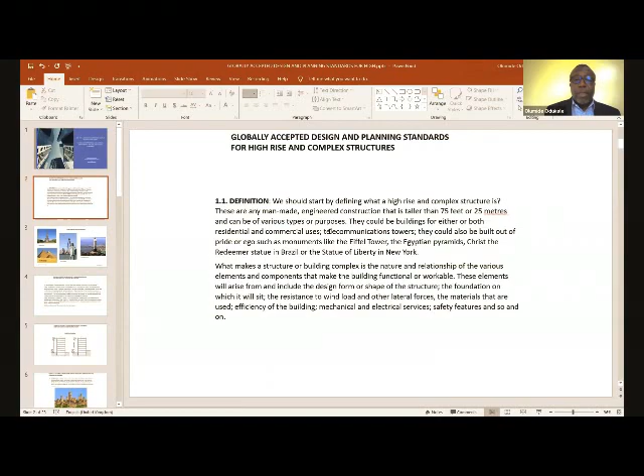Now, what makes a structure or building complex is the nature and relationship of the various elements and components that make the building functional or workable. These elements arise from and include the design form or shape of the structure, the foundation on which it will sit—which is a challenge, as we have seen today, especially in Lagos where we have a lot of loose soil—the resistance to wind load and other lateral forces, the materials that are used, the efficiency of the building, mechanical and electrical services, and several other factors.

For the purposes of this presentation, I'll be discussing high-rise structures used as buildings. So specifically, I'll be talking about buildings. As we and a few other speakers have said, a high-rise building is one of a certain height. A high-rise building has become more usable or more popular because of elevators and the advancement of technology. The discovery of the elevator has made it possible for people to move between various floors, and to move goods and people between various floors.

These are buildings with heights, and we also have to look at it from a fire and safety point of view. There are buildings whose heights are beyond the reach of firefighting equipment and can have a serious impact on the evacuation of occupants in emergency situations. A high-rise building is defined as a building with an occupied floor located more than 75 feet above the lowest level of fire department vehicle access.

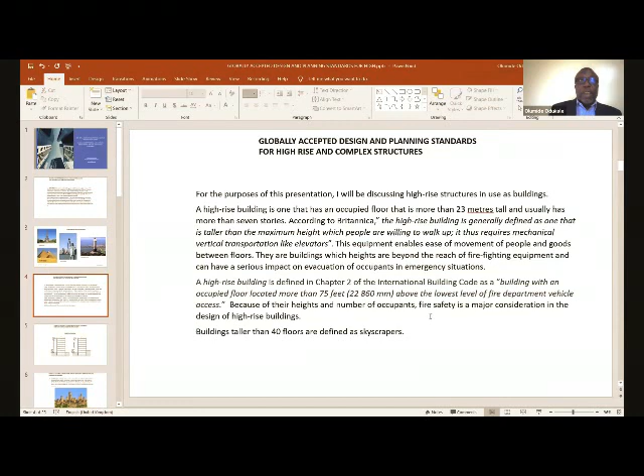Now, we can also talk about what sort of fire equipment we have in Nigeria. Because of the heights and numbers of occupants, fire safety is a major consideration in the design of high-rise buildings. We must also state that buildings taller than 40 floors are not necessarily defined as high-rise; they are defined as skyscrapers. What we have described earlier is shown in this image as regards fire access.

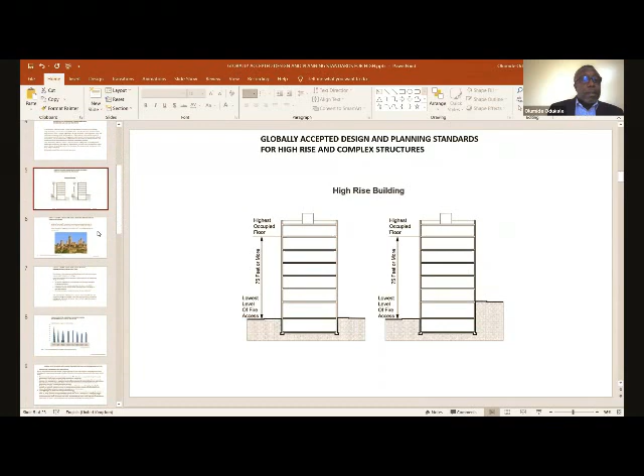Now, I want to go back and look at the history of high-rise buildings. How did they come about? Where did they start from?

They date back as far as ancient Rome and the Roman Empire, where some of those high-rise buildings and towers were erected to defend cities. A few examples are in Egypt and in San Gimignano in Italy. Now, some of these buildings at that time were made of wood and brick, so it was not uncommon to have failures in those structures.

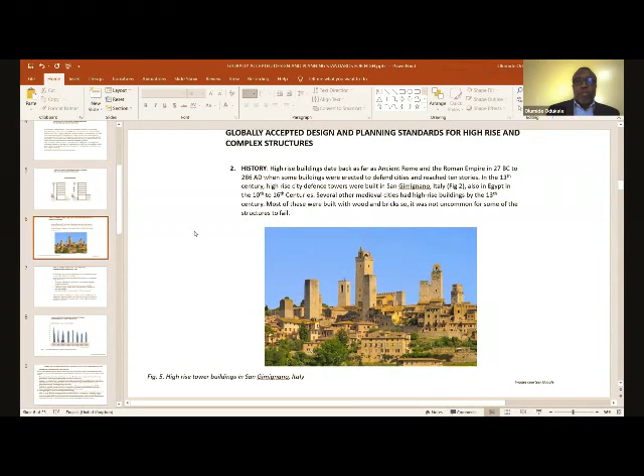But like I said earlier, the discovery of the elevator and steel during the Industrial Revolution removed height limitations for buildings. It was not possible to go much higher before because we could not frame the building with steel, which was a new material not available for a long time.

Several other socioeconomic factors have contributed to the increase in the development of high-rise buildings: the increase in population density and the need to provide housing for that growing population. In the last decades, especially after World War II, we've seen a global population explosion, especially in Lagos now - we have seen what is happening with population increases in Lagos.

The increase in land value in major cities and urban centers, also after World War II - so there was a demand for land and the prices were going up.

Then also, especially in North America, there was competition amongst corporations to outdo each other in the height of their office buildings. So it was a case of, the bigger my building, the stronger my company should be. And marketing campaigns also, especially in the 70s and early 80s, promoted the allure of living in the sky - when you're up there, you have a good view, you're up away from everybody. So all this contributed to the promotion of high-rise buildings.

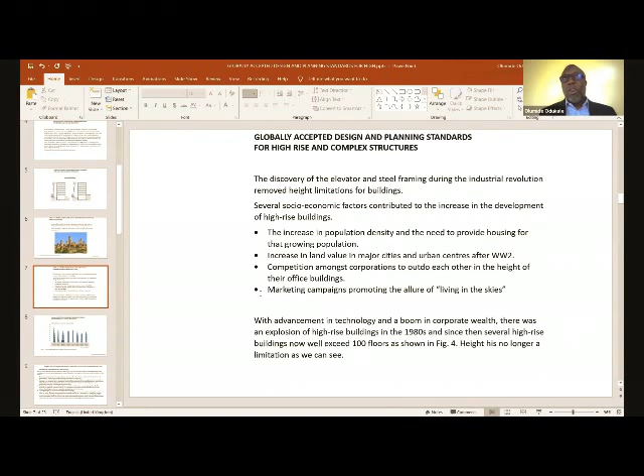Height is no longer the strong point anymore. As we have seen if you travel to various places, the tallest building now is one in Dubai, the Burj Khalifa, which many people did not even think could be built. It is about 828 meters. So this sort of building is now quite common to see.

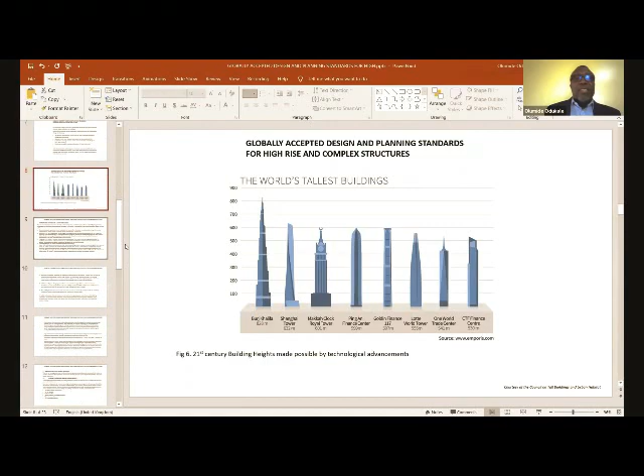Now, what is the design process for this kind of building? There are several factors that should be considered by architects and building designers when embarking on the design and planning of high-rise buildings. This will be consequential to the success of that final product.

And they would include, and this was mentioned by the previous speaker, Mr. Okonjo, the permitted height regulations for such buildings in that location - what is the zoning for that location? This information is usually available through the local city planning office or gazette, and any restrictions defined therein must be complied with.

The nature of the soil in that location - this will usually require a geotechnical investigation and analysis of the soil on which the foundation of the building will sit, by a geotechnical engineer, in order to determine the load-bearing capacity and other conditions of the soil, and therefore the foundation type to be used.

Now, this is very important in a city where there's a lot of made-up ground. We hear this expression, oh, sand-filled - so a lot of reclamation has been done. For instance, Parkview used to be a park and it was quite swampy, and that has been filled up. Even Banana Island was water, and it has been filled up. So it is very important in a city like Lagos that the nature of the soil is ascertained, and thereby the foundation type to be used is properly looked at.

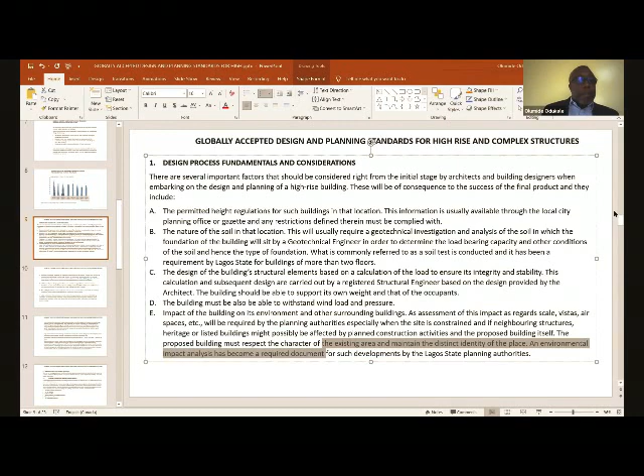The mechanical, plumbing, and ventilation requirements for the building are usually done for most buildings, small and large, but they are particularly important for high-rise buildings because of the large occupancy and the complexity of the network of these building services. Several of these services are also designed to achieve good efficiency for the building. Recently, in the last decade, people have been talking about global climate change, sustainability, energy efficiency, and environmental friendliness, which are now designed into many buildings. LEED standards and certification are now commonly desired and achieved.

This is also catching on in Nigeria, where the demand for this sort of building is growing. People want to save energy, people want to protect the planet, and ask why their building should use so much energy. Then also the building brand and the aesthetics matter. Every building of that nature has a client, and the client's vision must be enhanced and projected by the building's design and choice of material for the interior and exterior of the building.

Safety and comfort of the occupants must be built in through adequate natural and artificial lighting, ventilation, fire prevention and protection, as well as clearly defined fire escape points. Vehicular access, circulation, parking, as well as other factors that will enhance the safety and comfort must also be of utmost priority.

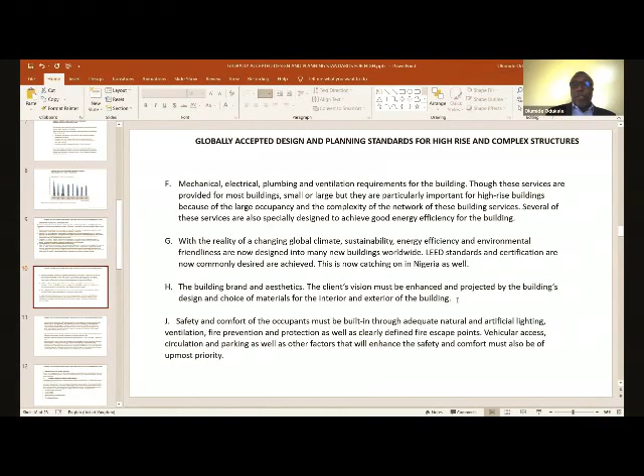A full complement of experienced building design consultants must be engaged on the project. A few of the previous speakers have spoken on this, to provide design solutions for all the factors listed above. This will include the architects who initiate the design concept, the structural engineers who design the building's foundation and frames, and the MEP engineers for various services that make the building comfortable. Oftentimes there are specialist consultants who handle other aspects, such as the soil engineer, fire safety and detection, egress—that is, how to get out of the building—security, information and communications, etc.

Large volumes of construction drawings and documents running into hundreds of pages are produced by the various consultants in order to obtain necessary planning permits and for the construction work. To embark on such a project without the involvement and participation of such a team is most often a recipe for failure. It is not uncommon in this country for people not to engage consultants. Oftentimes, consultants are even seen as an additional cost to the project, so a lot of clients try to do without them, thinking 'I don't need that extra cost.' But it's not just about doing a design or a drawing—it goes far deeper than that, as we have seen. Their input and contribution is very, very crucial.

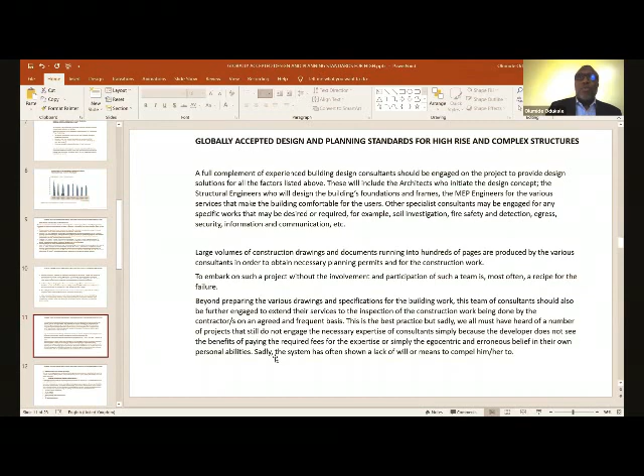So they did two floors, nothing happened. 'Oh, okay, I can do six floors,' and then 'I can do ten floors,' without necessarily having the required skills or the backing of the expertise of consultants. Also, sadly, the system has often shown a lack of will to deal with situations where projects don't have consultants engaged. The system tends to look away, and sometimes there's no law that compels anyone to engage consultants. So again, we talk about regulation—what are we allowed to do? What can you do? What is not allowed?

Now, what are design and planning standards? What are the standards that we're talking about? These are sets of guidelines that have been defined by regulations over time, and they must be adhered to in the construction of the building.

These guidelines are in place to ultimately allow for the optimal integrity of the building, safety and comfort of the user. In defining, now what happens in other parts of the world? What is globally accepted? I'm going to focus on North America, which is where high-rise buildings became very popular before Asia now took over, and they seem to have a lot more of those buildings.

In defining globally accepted design and planning standards, we cannot but ultimately do it in a manner that we relate them to our local situation. So when we look at what happens in North America, we also have to compare it to what obtains in Nigeria. What is different? What are we doing differently? Why are we having all these issues, all these building collapses?

North America is probably the continent where high-rise buildings were made acceptable to the whole world, but it has also recorded the most mishaps and casualties from this building type. They've also had fires, they've had collapses, they've had terrorism, they've had loss of life. As a result, in order to prevent or reduce this unfortunate incident, they have developed several building codes that guide practically all requirements for the various elements of the construction of high-rise buildings.

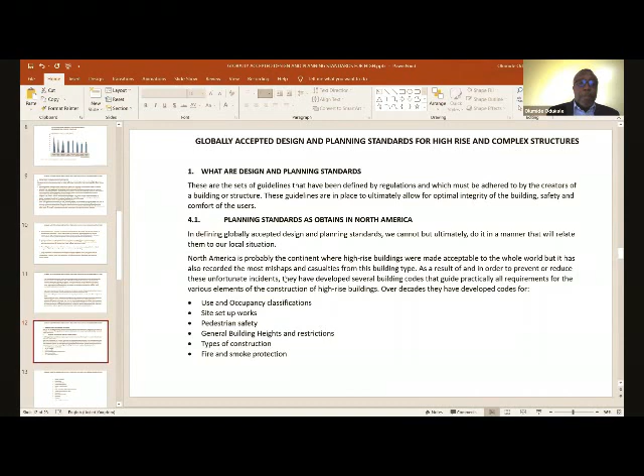So there are codes for almost everything - use and occupancy, the site setup, pedestrian safety, building heights, fire, smoke, type of construction, and so on, many more. Plumbing, elevators, the steel, the materials, the roof structure. Everything has a code that must be met.

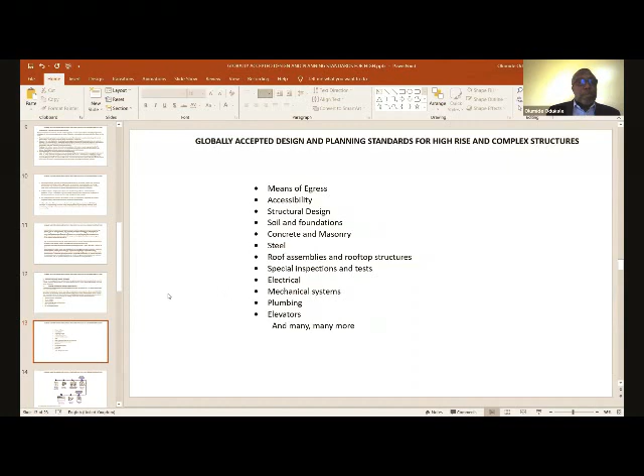And the process for approval is pretty straightforward as well. So you have all this code that you must have. There's a document that tells you what is required. This document is very familiar. A lot of the consultants who are involved are very familiar with this document. They are conversant with what needs to be done.

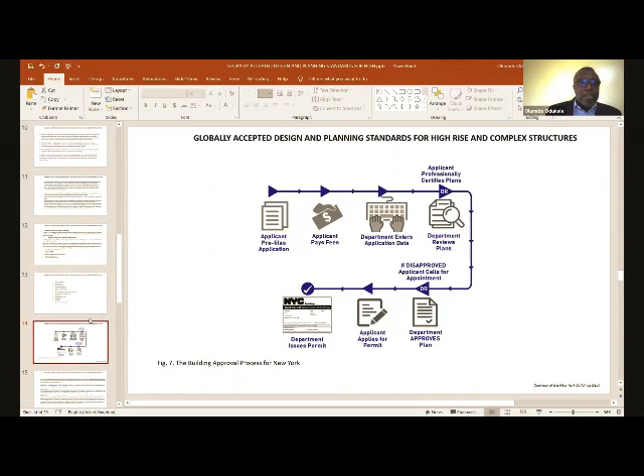Now, what is the process abroad? The drawings and documents are prepared and certified by consultants. The process of design and planning is made less cumbersome because there's information to be obtained. There are things you want a code, you can Google it, you can make a call, it's online, you can get it. And then the advancement of technology through new software makes the design now of high-rise buildings fairly easy. A lot of things have become standardized.

For approvals, a registered architect or professional engineer, as the case may be, submits the plans and documents to the relevant department of the city for necessary approval.

Now, this third aspect is very important - the contractor. Once the building approval is issued, that is an approval that you can actually build the structure, a licensed contractor is appointed. It is that licensed contractor who applies for a permit to build. So he will obtain a work permit to start construction work. Without that license, even when you have approval, a contractor cannot start work.

It is important to know the requirements and role of the contractor in this context. The contractor for a high-rise building must be licensed by the state and will be the one who has issued a permit to construct. Then inspection.

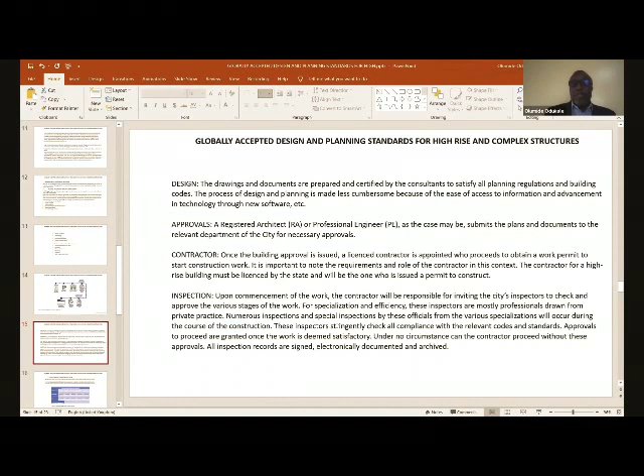Now, what obtains in Nigeria on a regular basis, on a normal basis? We're talking about land use and demand on land. As mentioned earlier, increasing land values in cities and population growth have led to an increase in demand. Lagos, Nigeria is not any different.

It's where high-brow neighborhoods have witnessed an increase in population and a significant rise in the rental value and cost of land. I mean, somebody was telling me some days ago that Banana Island, for instance, was 10 million from 2 decades ago. Now, they're probably talking about 600, 800 million per plot. You can then look at what that means.

So the table below shows population growth of VI and Ikoyi. This is from the Lagos Model City Plan. In 1991, Victoria Island had 40,000 people.

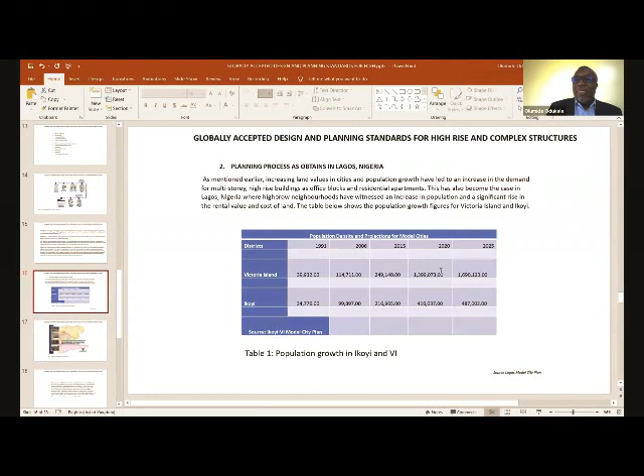The projection for 2025 is about 1.7 million people. Ikoyi seems to follow the same kind of trend. Ikoyi used to be a low density, quiet neighborhood, but that seems to be changing.

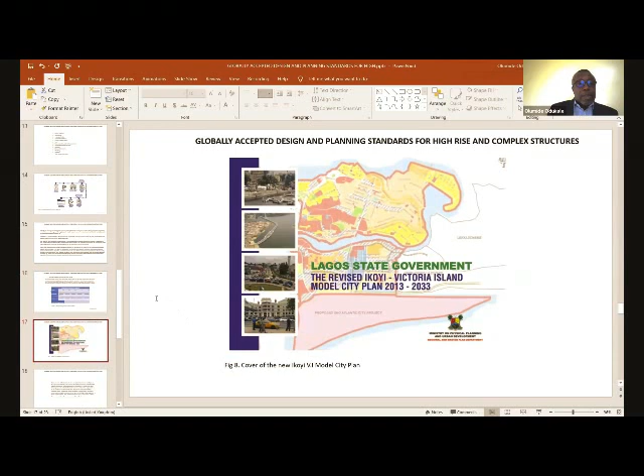There's a new Lagos City, a new Lagos Model City Plan. There's one for Ikoyi and Victoria Island, and there's also one for Ikeja. Those are considered urban centers in Lagos.

There was a lot of frustration and pressure by landowners and developers on the state planning authorities to lift existing restrictions on height, which many developments had already begun to contravene. In a place like Ikoyi, there were people who felt, if I paid so much for this land, why should I just put one unit on it when I can put six units?

So flats were starting to come up, built on a single family plot of land. In response to this changing demand and other future development objectives, Lagos State introduced a model city plan document for Ikoyi and Ikeja in 2013.

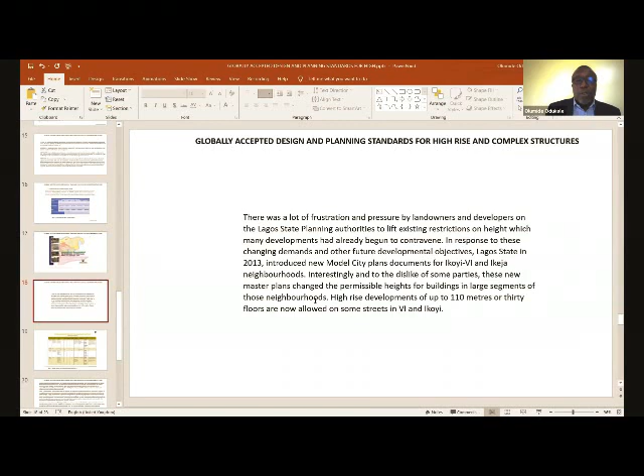Interestingly, and to the dislike of some parties, this new master plan changed the permissible heights for buildings in large segments of this neighborhood. High-rise developments of up to 110 meters or 30 floors are now allowed on some streets in Ikoyi and VI. This is a page from the new approval order from the model city plan.

The recent unfortunate incident that occurred on Gerard Road — if you look at row 4, Gerard Road is now 110 meters permissible. Units per hectare is now 150 units per hectare. So that tells you where we're going, what the future holds in terms of building heights in Nigeria.

So in preparation for this master plan, Lagos State had a review. The Lagos State Assembly enacted a law in 2010 for the administration and regulation of physical planning. They basically created new departments within that ministry, including the Lagos State Physical Planning Permit Authority.

They're actually the ones that issue building permits to intending developers. Then there's the Lagos State Building Control Agency. Anybody in construction, in the building industry, would have heard of LASBCA. They're very popular, and they have the authority to regulate, enforce, and inspect buildings under construction.

Now, the process is not different from North America. Drawings are prepared by registered building professionals for submission to LASPPPA. All required documents are submitted and an assessment fee is calculated, then the necessary payments are made.

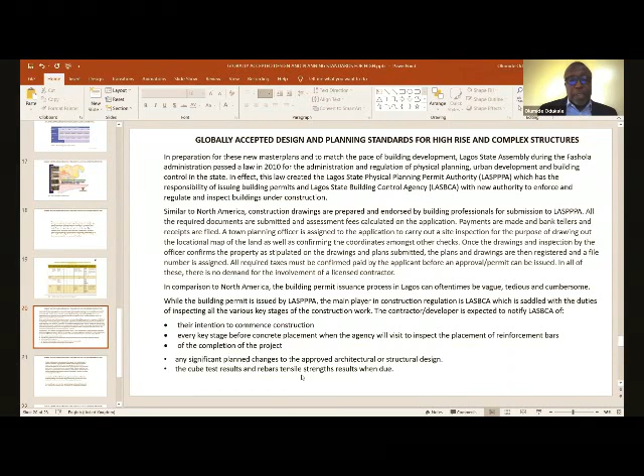Now, because the system is different here, the inspectors are salaried staff of the agency, so there are delays in scheduling inspections. There are manpower shortages, and delays could also come from the contractor, who either doesn't understand the process or has not given adequate time.

A considerable bit of work is required to make the process more streamlined and more effective. Current methods of enforcement of planning regulations are generally not deemed purposeful or corrective. So you have your building, they come to mark your building, and you start to question why they're there — you're not even sure why. Oftentimes, when people see that the building has been sealed, it's revenue generation.

Gladly, in recent times, the Federal Fire Service has also been involved in certification of buildings above 2 floors. But this involvement still needs to be clearly defined and better harmonized with state planning regulation processes. This is the Federal Fire Service, not the State Fire Service — how well are they working with Lagos State?

Are people notified or informed of this requirement when they put in their application to Lagos State?

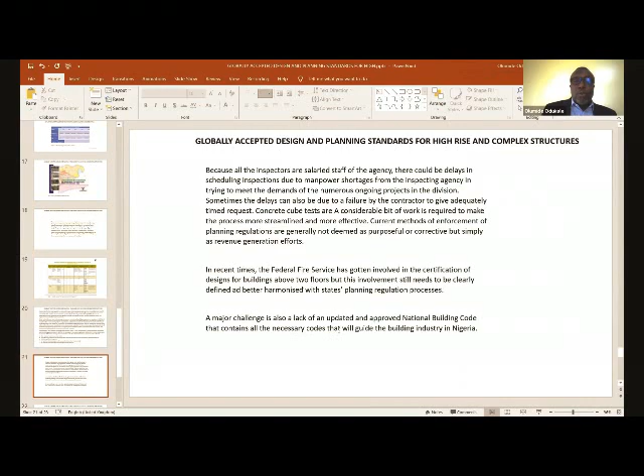Mr. Ige spoke about regulations and building codes. One of the major challenges we have right now is the lack of an updated and approved national building code. There are several editions, but none has been approved by the National Assembly. This should contain all the necessary codes to guide the building industry in Nigeria.

In conclusion, the question I would ask is, what can we do better? Some of the differences in the standards adopted have been mentioned earlier, but there are things we need to improve upon urgently.

There's a lack of knowledge by the general public of what is required. Continually educating the public on what is expected and the possible consequences of not engaging qualified professionals for projects. Regular town hall sessions are a very impactful means of achieving this.

Providing ease of access to all necessary planning guidelines for obtaining building development permits. Electronic means of sharing information and data will make a world of difference. A few years ago, Lagos State created an electronic application portal for online approval applications, but oftentimes there are technical glitches, so people end up taking manual applications for submission instead.

When the rules are clearly defined, they become easier to adhere to. Making the process more streamlined, where documentation is better shared between oversight agencies. Developments that are compliant are sometimes marked for contravention because the approved documents were not shared to the enforcing unit. I've seen situations where one agency is not even aware that you're on site, or that a building has gotten planning approval.

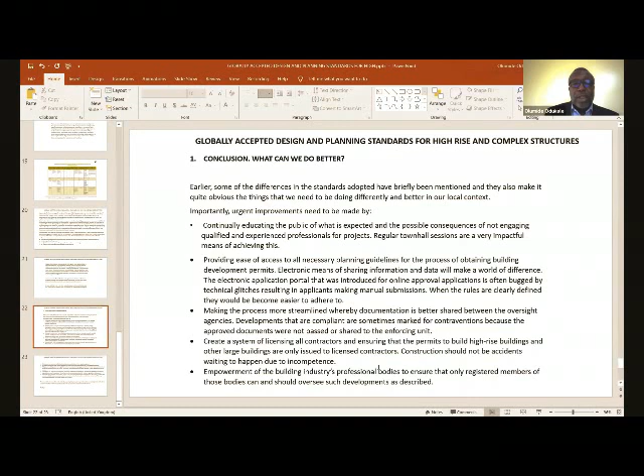Empowerment of the building industry professional bodies to ensure that only registered members of these bodies can and should oversee such developments. There should be periodic interface between the building industry professional bodies and the regulatory agency.

Enlarging the building construction regulatory and inspection agencies by engaging experienced private sector professionals as part of the mandatory inspection process. This should make the process more robust and build more effectiveness into it.

Ensuring that all stages of construction work for all buildings, especially high-rise and tall buildings, are seriously inspected from start to completion. This will be from the pile foundations right to the roof elements. It's not just about walking into a site and signing a paper, but everything should be checked.

What does the concrete need? What was your pile load test result? Did somebody witness the pile load test? Making the entire approval to inspection process more purposeful, with care and intention.

Oftentimes, a building that has been sealed for an obvious contravention is seen to be unsealed without the removal of the contravention. This is very common in Lagos. There are buildings that have not observed the required setback, and it's glaring, it's obvious to everybody. The building is sealed for that purpose, and in a couple of weeks construction resumes without the contravention having been put right. This may encourage belief that rules can be bent to one's purpose.

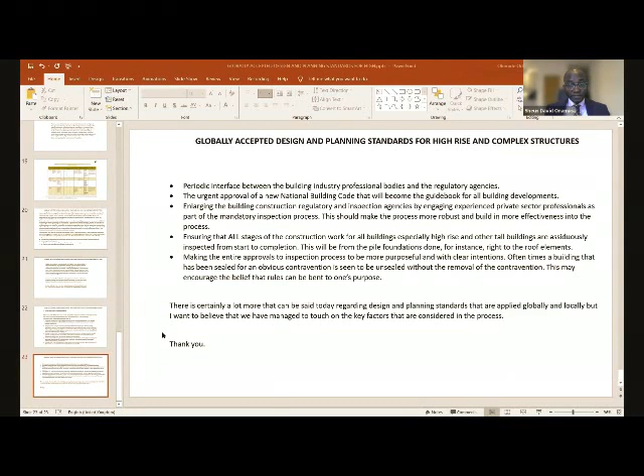Hello, good afternoon everyone. Greetings to all who have taken time out of their busy schedules to attend today's meeting. It's greatly appreciated. I'll just give a brief rundown of my topic, which is: what are the environmental factors that affect high-rise building projects?

Just to give you a background on me and my career so far, I am a civil engineer, chartered engineer, and I've worked in various phases of projects and with various companies as a civil engineer. Currently I specialize in environmental management. So I'll give you a brief rundown on some of the factors which I think should be considered when undertaking high-rise building projects.

Designing a sustainable tall building requires a total view of the entire building enterprise, considering the local and global environment, availability of renewable and non-renewable resources, a decent community impact assessment, and the collaborative input of architects, engineers, planners, social scientists, and other community-based groups.

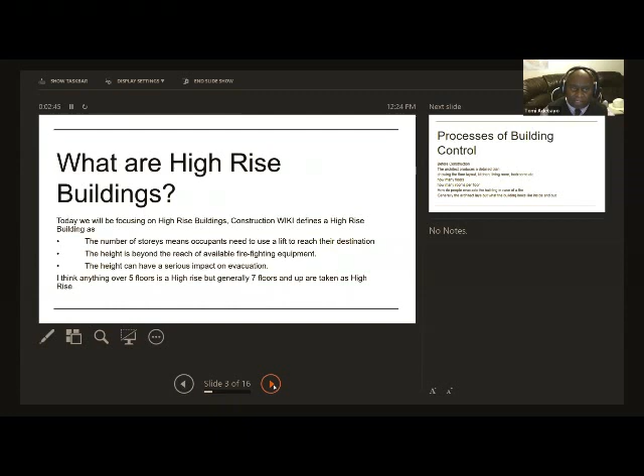So in my opinion, these are the processes of building control. There are processes that have to happen before construction. Wale Ogundalu has mentioned some things, Engineer Ige has mentioned some things, having the architect's drawing, having town planners, QSs, and all these people involved before this thing comes to building control.

The architect produces a detailed plan. The architect thinks of how people are going to get out of the building in the case of a fire. Let's move to the next slide.

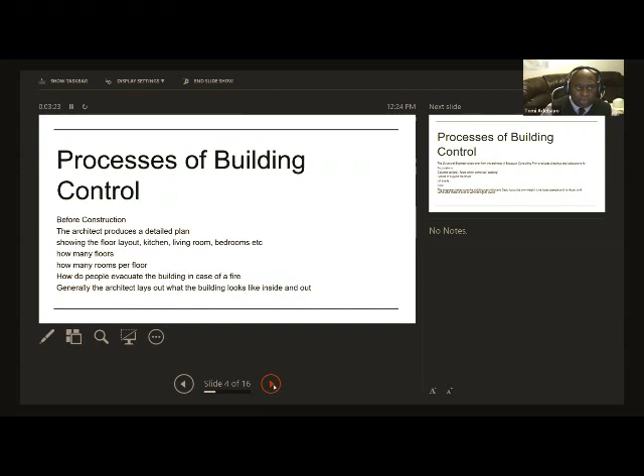Now, after the architect has done all his nice looking drawings, well presented and attractive to end users, the structural engineer has to see how this building is going to be built safely, how it's going to remain under all sorts of loading, just like Wale has said, columns, pillars, beams, lift shafts, roofs. Somebody has to make sure that all these things are strong enough to withstand all the loads.

When we talk about dead loads, we're talking about the actual load of concrete, the actual weight of the structure. And when we're talking about live loads, we're talking about things like the people that are going to be in there.

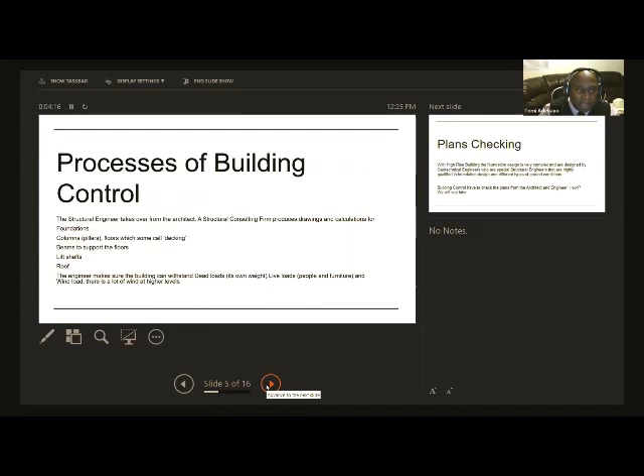In the final analysis, just like you've all said, when you're talking about specialists, the problem with building control is that all these specialist drawings are sent to a building control section. And when they're sent there, do they actually have the skills to check these plans? Do they have the skills?

If I'm talking about finite element methods to a building control officer in Lagos State, does he really know what I'm talking about? If I'm talking about piling, secant piles, ground piles, all sorts of piles, does he really know?

Odukale said something about private sector involvement, because you do need these sort of people, as these things are beyond the skill of the day-to-day building control officer anywhere in the world. In the UK, we have approved inspectors who are actually in the private sector and are regulated by a national body.

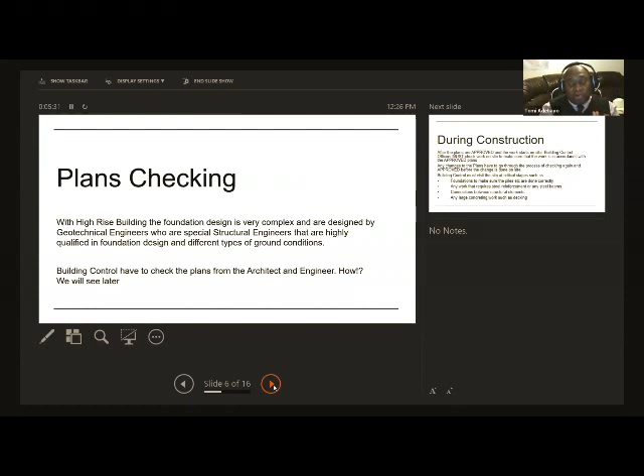Let's move on. Now, during construction, you also have inspectors from building control who should have copies of the approved plans with them. So they have a copy of the plans, and like Engineer Ogundalu has said, this foundation is supposed to be this deep.

This column is supposed to be 300 by 400. The reinforcement is supposed to be 20 millimeter at 200 centers. And that is what he's got in front of him, and that is what he's supposed to be checking.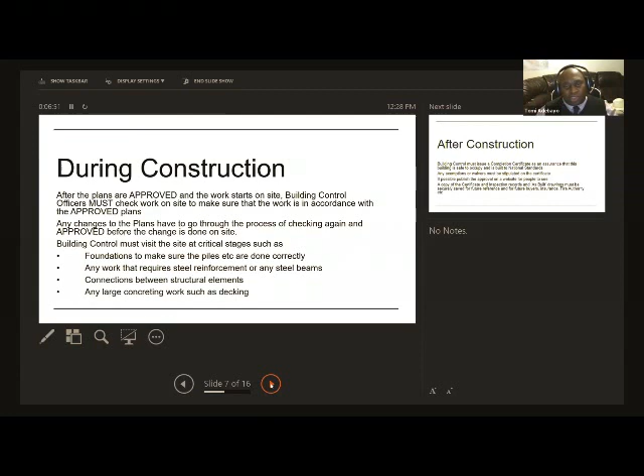Now, when you're talking about specialist things, particularly high-rise, there are some things that could be beyond the skill of a standard building control officer. If you're looking at connections, if you're looking at steel reinforcements, some of it is very complicated. What steel needs to be at the top? What steel needs to be at the bottom? What are the shear links? All sorts of things that in some countries, like probably in the UK, a structural engineer goes out to do the structural checks, and then you bring in all sorts of consultant building control officers to look at other things.

After construction, due diligence matters because sometimes a building or flat needs to be sold. You want to buy a flat and know that the one you paid $1.2 million for has actually been checked and audited by somebody, and there is a certificate you can use in future as assurance that this thing has been done properly.

You might have to take out insurance to cover the property against fire and other risks, and having a completion certificate shows that at least a level of assurance has been adopted. You also need as-built drawings so you can refer back to them in future.

I use the phrase effective building control because building control cannot be effective if the officers are not qualified and experienced in high-rise design and construction. Again, the private sector can help with that. Building control officers also need legal powers.